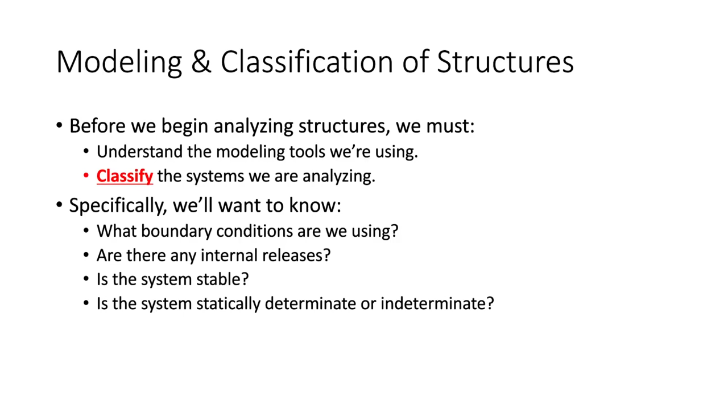As an example, one tool we'll learn to develop later in the semester is called an influence line. An influence line is a diagram used to assess a structure subjected to loads that move. What type of structure do you think that affects? A bridge, exactly—bridges are subjected to moving loads. So how do you analyze a structure when the loads move? We use influence lines, and in order to construct influence lines we use internal releases and whatnot. So there are uses for this even if they don't physically exist in the real world.

Okay, so let's talk about the modeling aspect first. From the last lecture, remember the idea I wanted you to have present in your head, at least in the background as we go through these problems, is that structures are complicated.

They are three-dimensional, dynamic, nonlinear systems, and if we really wanted to get down into the weeds of analyzing a structure, we can get real complicated. I know some of you might have experience with refined 3D finite element techniques. You can go really nuts trying to represent behavior, but there's a computational expense to that. The more difficult you make your analytical model, the harder it is to analyze. And then you ask yourself, is it really necessary?

As an example, here's a roof truss. I'm going to simulate these roof trusses with a two-dimensional plane truss analogy that might look something like this. There are assumptions baked into this structural behavior, and those assumptions sacrifice some accuracy. For example, one assumption in truss analysis is that members only carry axial load—they're either only experiencing tension or compression. That's it, no bending moment, no shear, none of that. In strict honesty, that's not 100% true. There's always going to be a little bit of shear, a little bit of bending moment, even in a truss.

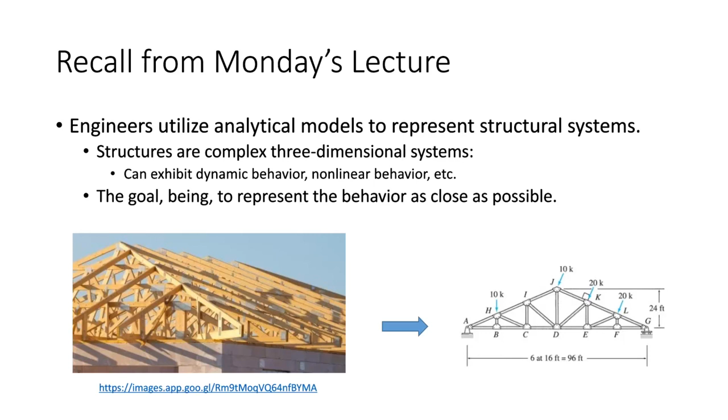But is it worth it to really consider that? If you consider shears and moments in this structure, suddenly it becomes highly indeterminate and very difficult to analyze by hand. But is it really going to affect the size or selection of your poplar elements in your roof? Probably not—whether poplar, Douglas fir, number 2, Georgia pine, whatever. In the end, we are engineers, and it's our job to spec out the dimensions, size, and details of this system. I guarantee a plane truss analogy will work just fine for a system like this. But you need to recognize that with these assumptions, there is a slight cost of accuracy. Just keep that in your head.

So modeling assumptions aren't just mechanical, they're also geometric. For example, it's very common in structural analysis to take a three-dimensional bridge and represent it as a two-dimensional model. In this class, we will primarily analyze structures that are two-dimensional. We won't really get into 3D. That doesn't mean structural engineers don't do that or don't have to consider the third dimension—we do. But we can usually handle that through approximate techniques like tributary area. In bridges, we utilize live load distribution factors, and so on. This is what we do in practical engineering.

So I'll go ahead and tell you, no IJK in this class—we're not doing it like that. In fact, we're going to revisit how we sum forces and moments from the get-go, and you'll find that the approach we use is a lot easier. If you want a simple explanation for what we do in this class: we take what we did in statics and mechanics of materials, and we develop simpler ways of doing it, but we analyze more complex structures. That's the goal of what we're doing here.

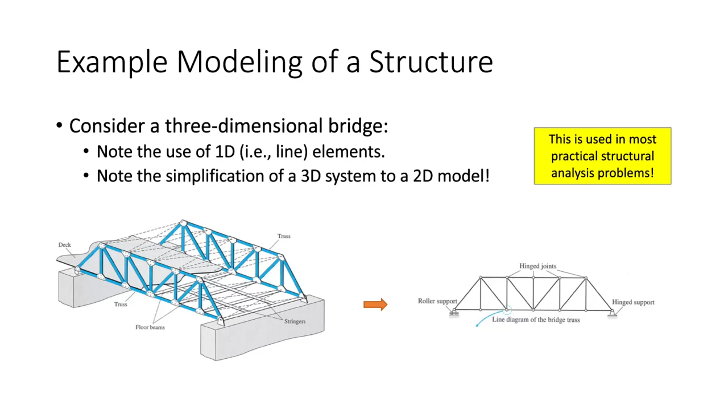So when we analyze structural systems, we do what's called a load takedown. It's sort of like a hip bone connected to the leg bone type of thing: load from the beam goes to the column, load from the column goes to the ground. Later in the semester, we'll perform load takedowns using tributary area so you can see how that goes.

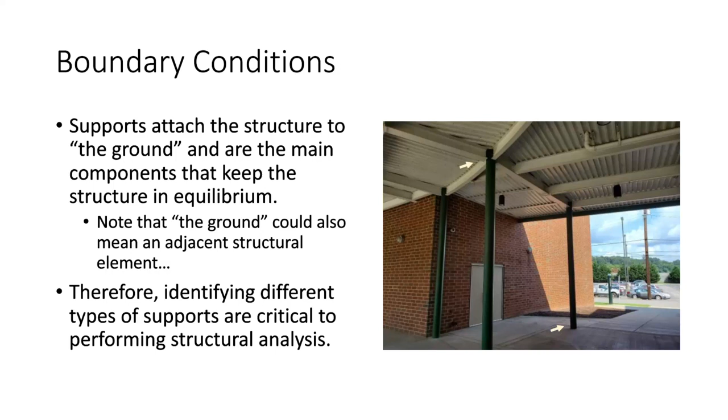In terms of identifying the types of boundary conditions we use, this is probably where we start getting a bit more familiar to what you've done in statics and mechanics of materials. There are really three main support conditions that we utilize as engineers.

The first is pin supports. Pin supports restrict translation but allow rotation. If we look at the reactions, we get two unknown reactions, one in the X direction, one in the Y direction, but no moment. These tend to allow rotation.

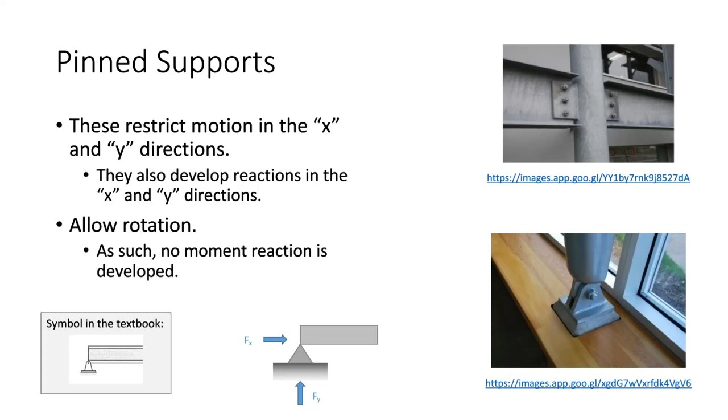I'll probably draw this as a triangle. You might see something like this in the textbook, but that's basically the definition of our pin boundary condition. I get the feeling at this point I'm starting to get into more familiar territory. Am I right?

Okay, roller supports. These usually only restrict motion in the direction of the roller. One thing we didn't deal with in statics and deformables, which we will deal with here, are inclined rollers, because that is a possibility as well. They only develop a reaction in the roller's direction. And there are examples of this in the real world.

One example I always like to use in bridges is fixed and expansion bearings. If we're talking about a bridge in West Virginia, in the summer we can hit 90 or even triple digit weather, but in winter we can get well below freezing - a huge temperature differential. Bridges expand and contract under different thermal loadings, so we have to have one of the bearings or support conditions allow and receive that thermal expansion and contraction. Otherwise you can get a lot of external thrust applied to your support condition. So it's very common to have one bearing that is fixed, keeping the bridge in place, and another that allows a little movement along the span.

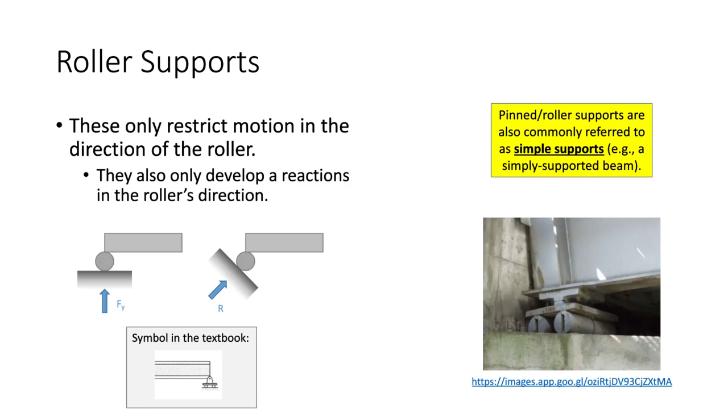So a hinge-roller boundary condition does have some very real-world analogies. Now, if you ever hear me use the term simple supports, what I mean by a simple support or an element that is simply supported is pin and roller supports. The reason I lump those together is because pin and roller supports do not resist moments, whereas a fixed support, something like this, does resist moments. So analytically, you will sometimes find that I lump pin supports and roller supports together. If you ever hear me refer to a simply supported beam or simple supports, that's what I'm talking about.

I'm talking about a pin and roller situation. Fixed supports, however, transmit both shear and moment.

So that's analytically and physically, those are really the differences between those two systems. Everybody okay with that? Any questions?

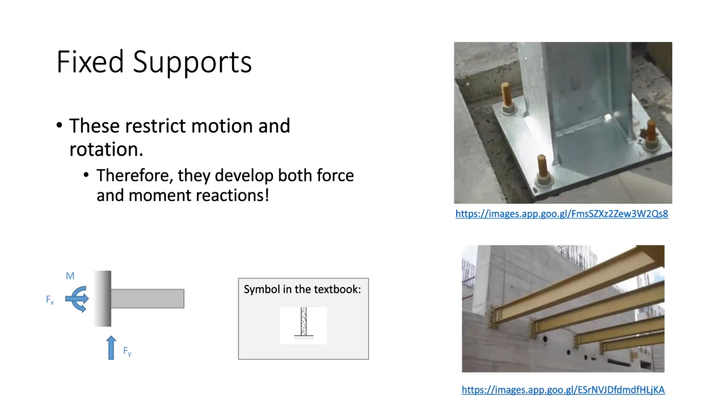Okay, now let's talk about internal releases. An internal release means I'm relieving a response at a given location. For example, if here's a table and I sit on this table, I am bending the table. The table is developing internal shears and moments.

But if I place a release at a given point, a very common one would be a hinge. The idea is that at that particular point, I know what the internal moments are. If it's a hinge, the internal moments are 0.

Now, there are physical analogies of this. Has anybody ever seen a bridge connection that looks something like this? Have you ever seen this before? This is what's called a pin and hanger connection, and this connection is specifically fabricated and designed to transmit no moment.

Now, if you want a reason for why these connections even exist in the first place, beyond just ease of construction, because they are a whole lot simpler than the splice connections you see in bridges nowadays, they actually made the bridge easier to solve analytically when they were designed. A lot of these bridges were designed in the 40s, 50s, 60s, where slide rules were still pretty prevalent. We didn't have computational masterpieces on our iPhones that can do all the math needed. These were days when the math was still done by hand—really done by hand. So actually inserting a hinge made the structure solvable by hand.

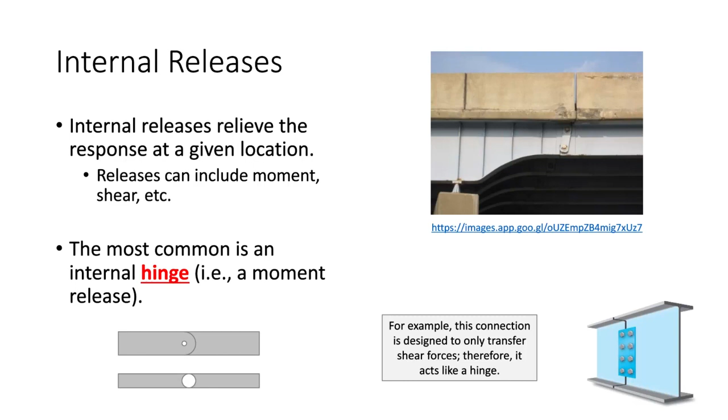This is fun stuff. Okay, so in terms of modeling, what I'm really after right now is to just make sure that you understand the boundary conditions that we utilize in order to assess or model a given system. Now I want to talk about classification.

So what I mean by classification is I want to take a structure and ask two questions: is it stable, and is it statically determinate? So let's talk about what exactly those mean.

Okay, so our best friends from Engineering 213 are the equations of static equilibrium, the sum of forces and the sum of moments. If we're talking about 3D, we have 6 equations of equilibrium in 3 dimensions: the sum of forces in X, Y, and Z, and the sum of moments in X, Y, and Z. So if you remember from statics, the fundamental equation was that the sum of forces must be equal to 0.

And that's good, great, grand, and wonderful if all the forces meet at a common point. Once they stop meeting at a common point, you exit the land of particle statics, and then you get into the land of rigid body statics.

In rigid body statics and non-concurrent force systems, your system must also respect that the sum of moments equals 0, otherwise it will rotate. So that's why we have sum of forces and sum of moments. Now, in 2 dimensions, we can idealize that to just deal with the sum of forces in the x direction must be equal to 0, the sum of forces in the y direction must be equal to 0, and the sum of moments must be equal to 0. Everything rotating this way has to equal everything rotating this way. Those are really the 3 equations that we need to deal with.

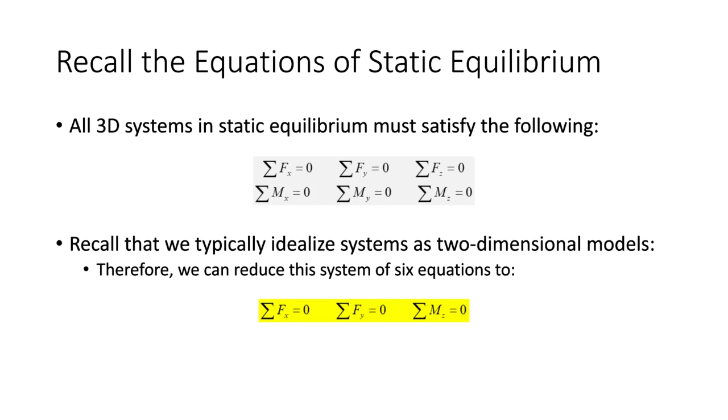I want you to keep that number in your head right now, the number 3, okay? Because that's a very important number. Let's talk about the number 3.

Here's a problem. I have a beam. What type of beam is that? I'm going to say it's simply supported, because I have a hinge roller boundary condition. Now let's go back to statics land. I have 2 reactions over here at the left because that is a pinned boundary condition, so an unknown reaction in the x direction and an unknown reaction in the y direction. What about over here? 1 vertical reaction, because it's a roller. So how many unknowns do I have? 1, 2, 3.

Well, how many knowns do I have? How many known quantities, how many equations of equilibrium do I have? I have 3. I know that the sum of forces in the x direction equals 0, the sum of forces in the y direction equals 0, and the sum of moments equals 0. There's that pesky number 3 that keeps popping up. So the way I've categorized this in this table is I have 3 unknowns and 3 knowns. My 3 knowns are the equations of equilibrium, my 3 unknowns are my 3 reactions.

This should start jogging your memory a little bit. For example, what is that? Let's see if y'all remember. What is that? Zero, right? And how did you do that? You said, okay, the sum of forces in the x direction must be zero, and there's nothing going horizontally, so that's got to be zero.

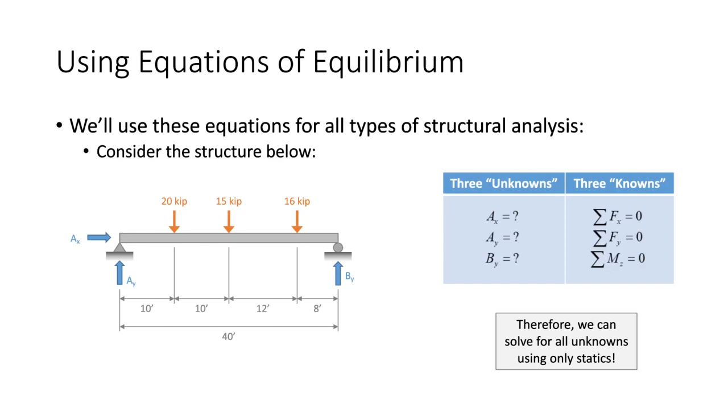Make sense? This is a system that is statically determinate, and that's really the key issue here. It doesn't just extend to external reactions, this also works for internal response as well.

Remember, the secret weapon of structural engineering is a samurai sword, or a lightsaber if you are a sci-fi fan. If I'm sitting here on this table, I am generating internal response inside this table. If somebody comes over here with a samurai sword or a lightsaber and cuts through the table, I'm going to have a bad day and their grade's going to suffer. It's a joke, not a very funny one.

The reason why is because inside the table right here, there is internal response being developed: an unknown force in the x direction, an unknown force in the y direction, an unknown moment. What I can do is cut a section, look at either component of the structure, and say okay, I've got 3 unknowns: an unknown internal axial force, an unknown internal shear, an unknown internal bending moment, and then I can solve for those unknowns, again utilizing my equations of equilibrium.

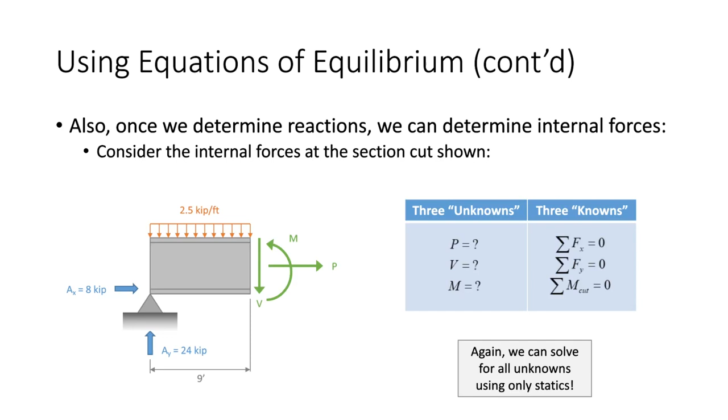Now, if there are more unknowns than there are equations of static equilibrium, then the system is indeterminate. Do we deal with structures that are statically indeterminate in real life? Oh, you bet, we do that all the time. Take a bridge that has a solid beam and put a pier in the middle. Indeterminate, okay? We do that all the time. That's a very simple example of indeterminacy.

This building, for example, the moment frame that withstands the wind load here in Huntington, that structure is highly indeterminate. And so you're in one right now.

Now, if the number matches, if we match the number of unknowns to the number of knowns, so if we can solve our problem using equations of equilibrium, then the system's determinate. If we have more unknowns, the system's indeterminate. But what if we have less unknowns? If we have less unknowns than we do equations of static equilibrium, the system is unstable.

And I've got some very clear examples to show you what that means. When you see it, you'll go, okay, I get it. I see some folks writing, so I'm going to give you a sec.

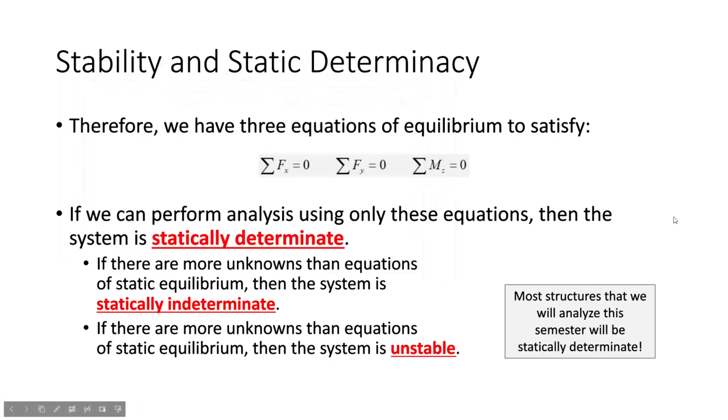Okay, so now what I want to do is show you a rigorous means of computing and actually determining the degree of external indeterminacy. So I'm going to call it indeterminacy, I sub E, the degree of external indeterminacy. So it stands to reason that later on we are going to have internal indeterminacy, okay?

And we're going to have internal indeterminacy because we're going to look at whether or not trusses are internally determinate or not, whether beams and frames are internally indeterminate or not. And the way that we compute that is we use this formula right here, okay? So we take R minus the quantity EC plus 3. There's that pesky 3 again. Where's that 3 come from? Well, it's the number of equations of equilibrium.

If you want to know where this equation comes from, let me see if this works here. This equation is essentially the unknowns minus the knowns. If you really want to know what this is, it's just a fancy way of categorizing that.

So, the knowns. Let's talk about what the knowns are. The knowns is this quantity EC plus 3. Whenever we do a 2D structural analysis, there's going to be three things that we know: the sum of forces in the x direction equals 0, the sum of forces in the y direction equals 0, and the sum of moments equals 0.

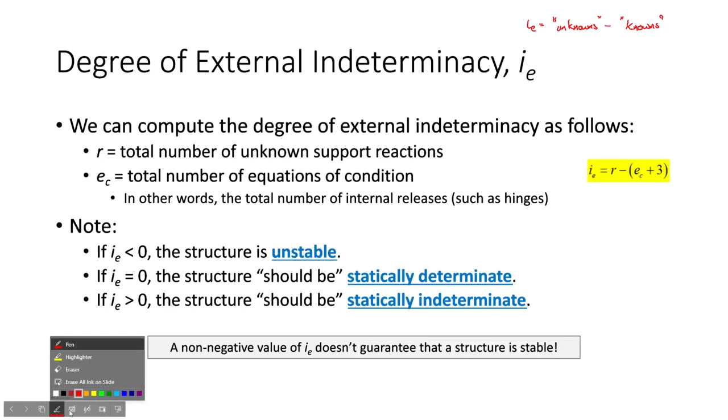Okay, let's look at some examples. Let's look at this structure right here. If I do the math, well, first off, if we look at all of these structures, none of these structures have any internal hinges. They don't have any internal releases or anything like that. So we're going to say E sub c equals 0 for all of them.

Let's look at the very first structure. There are 2 roller supports, so there's 2 reactions. If I just plug and chug into this formula, it states that 2 minus the quantity 0 plus 3, or 2 minus 3, that's negative 1, so the structure is unstable.

So, to be clear, if I is negative, the structure is unstable. But there's also very clear physical connotations to that as well. Look at this structure, isn't that a skateboard? If I take this structure and apply a lateral load, if I push it, is there any way that the structure can resist it? No, it's just going to go. So this structure is not statically stable because it cannot resist that lateral load. That's why when you have a negative value of I, the structure is unstable, because it doesn't have the means to resist loads in certain fashions.

This structure is stable and it's statically determinate. Now I'm telling you this structure is stable and I'm telling you this structure is stable. In the next slide, I'm going to help you define why that is. But from the maths perspective, if I have 1, 2, 3 reactions, no equations of condition, I have an I value of 0, the structure is stable and statically determinate.

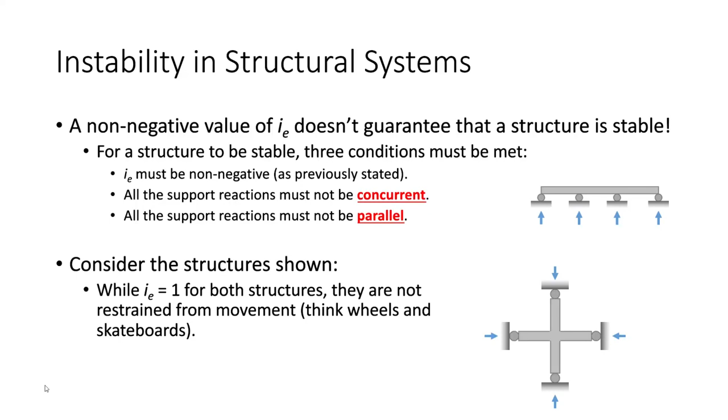Which didn't happen on these previous slides, right? If you go back to these previous slides, if I look at this structure here, we didn't have a situation where the reactions were all concurrent or all parallel. This one is not parallel with that one, and these two aren't concurrent, so yeah, that's stable, right? Does that make sense? Everybody okay with that?

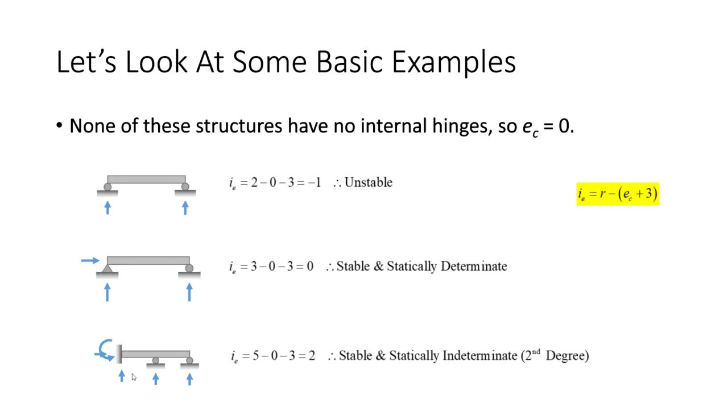So, the last thing I want to show you is what happens with equations of condition. Equations of condition serve to reduce your indeterminacy.

So if we look at this structure right here, let me use my pen for a second. This structure is indeterminate. It is stable and indeterminate, and it is indeterminate to the second degree.

If I throw a hinge in there, let's say I put a hinge right here in the middle, that increases the EC value by 1. So where it was statically indeterminate to the second degree, now it's indeterminate to the first degree. And if I throw 2 more hinges in, boom, it's stable and statically determinate, because I can utilize the internal releases at these points to solve for the reaction, something I'm going to show you how to do later.

Any questions? That's what you're talking about with the hinge and the bridge. Yes, and that's what makes it solvable by hand. Yes, and this is one of the reasons why older steel bridges you might see, that are multi-span, might have pin and hanger connections. This is one of the reasons. The other is it's actually easier to fabricate and construct, but this is a big reason for it. Let's actually do a few.

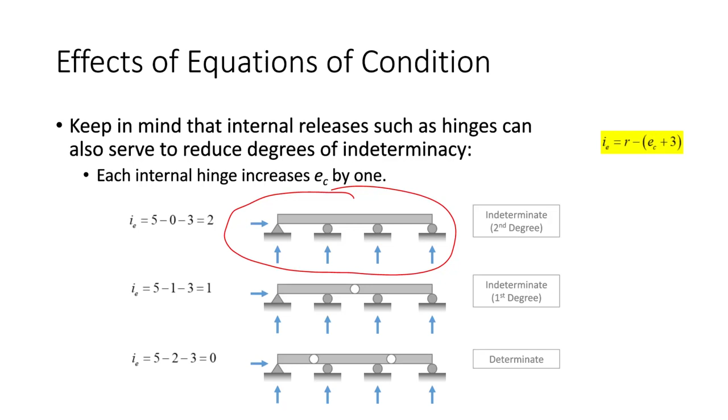Let's actually do a few. So I've got a few examples for you, and we're going to do these together. Let me pull this up here. We've got a series of examples, and I'm doing this in our OneNote, so if you're able to access that outside of class, you'll see that everything I'm about to write here will be present on the OneNote. So let's do each of these examples one at a time and see what we can do with our classifications. Let's start off with example 1.

The first thing I'm going to do is identify the support reactions. Let's start right here. This is a pin support. How many reactions do I have? 2, and this is 1, and this is 1. So I'm going to have a reaction here, a reaction here, reaction there, reaction there. So for this one, I might say R is 4.

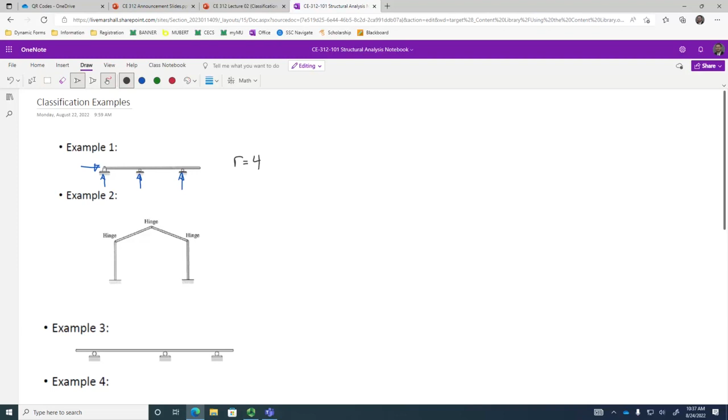Now, what about EC? Are there any internal hinges on this structure? No. So therefore, IE is R minus EC plus 3, which is 4 minus 0 plus 3, which is 4 minus 3, which is 1.

Now, the other question we should ask is, do we have a situation where all the reactions are parallel? No. Do we have a situation where they're all concurrent? No. So I would argue that this structure is stable and statically determinate, and I would say it's to the first degree.

Determinate or indeterminate? Sorry, indeterminate. I'm sorry, you're right. Remember, Marshall policy says I'm allowed 7 mistakes per semester, but I'm the one who keeps track of the mistakes, so it's a corrupt system. I know. That was a joke.

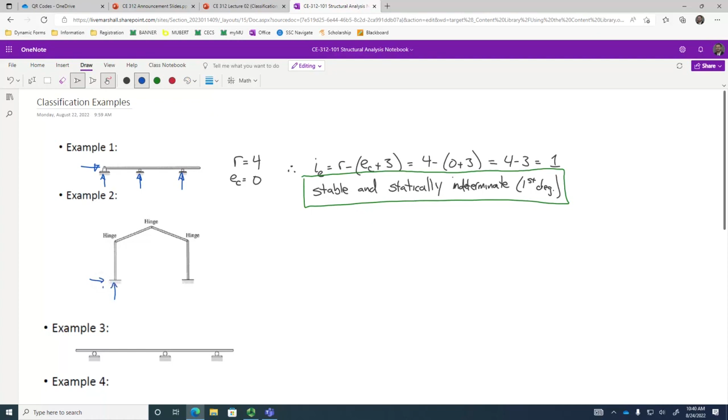So we have R is 6, because we have 6 reactions. But how many equations of condition are we going to have? Three. So if we compute, we get 6 minus 3 plus 3, and we get 0.

Now, do we have a situation where all the reactions are concurrent or all the reactions are parallel? No. So this structure is stable and statically determined.

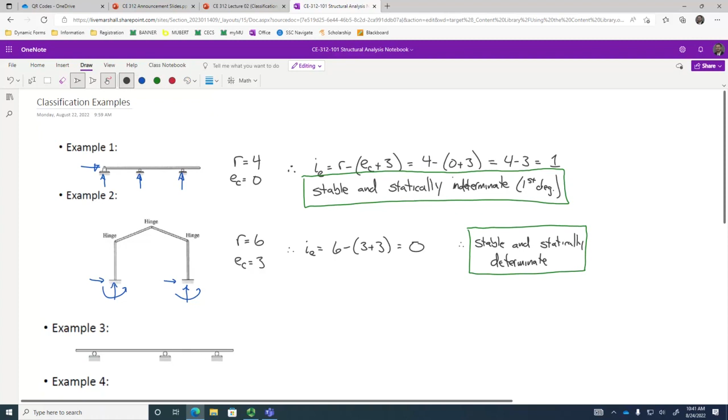What about example 3? Let me scroll down a little bit. So example 3, we've got rollers, right? What's the story? They're all parallel, which means that structure is unstable. Don't even bother doing any math.

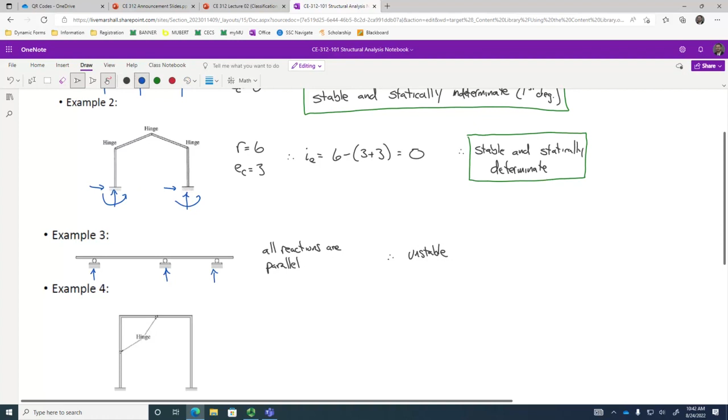I don't care what the IE value is, it doesn't matter, it's unstable. So what you can do for this problem is say all reactions are parallel, therefore unstable. Boom.

And so finally we can look at this one. I want you all to mess with this one, but tell me what you get. Yeah, you all work on this one. So we've got fixed supports here and then 2 hinges.

Anybody got an answer? Stable and statically indeterminate to the first degree. I think you're right on that because, let's see, we've got 1, 2, 3, 4, 5, 6, so R is 6. EC is going to be 2. IE is 6 minus 3 plus 2, which is 1. So yeah.